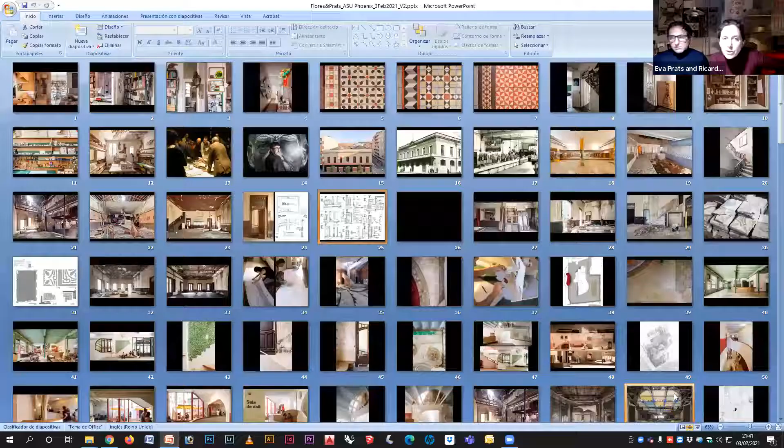We are based in Barcelona, and we occupy an old apartment house from the 19th century. We've been occupying its rooms for some years, so there's an accumulation of projects and models and drawings and presents from friends, even things no one in the family wants, like this mirror. We have it in our studio all around us. It's a place that has somehow organized our office with the rooms and spaces it has. We have set this order.

The main space with the most dimension is the corridor. This corridor is 30 meters long, I don't know in feet, maybe 90 feet. It takes like 15 seconds or more to go from one side to the other, and sometimes when it helps to think, because you walk this for a quarter of a minute, you find yourself on the other end and think, where did I come from? But maybe it's been useful to keep thinking.

The whole apartment has these beautiful tiles, and they change in every room. It's a very nice sequence when you move through the corridor and find these tiles, each with its own edges, and some of them move and make noises, so we know which ones not to step on. All the different colors and decorations on each one is something we really appreciate.

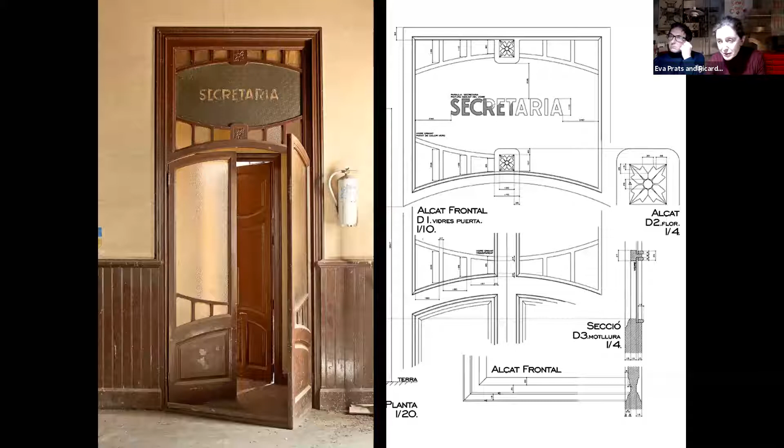We know this is somehow common material in Barcelona, and sometimes builders don't appreciate it and throw it away. So we drew it carefully, and things had to be taken out very carefully without breaking anything. I have a video that shows a little bit of the story of this, what happened with these doors and how many we found. Let me show it to you now - let's see if it works.

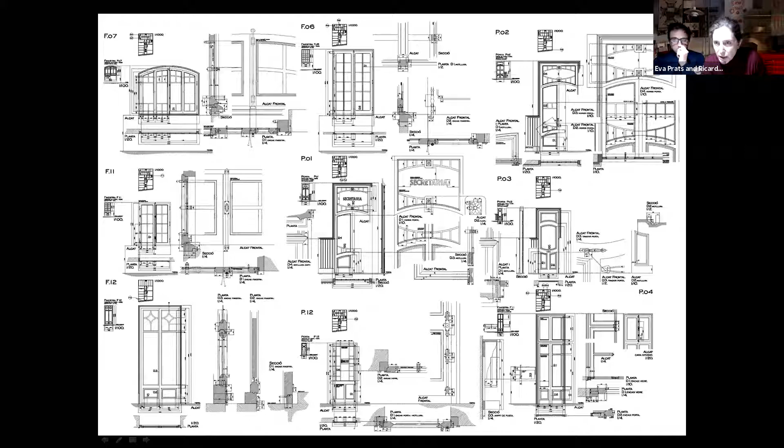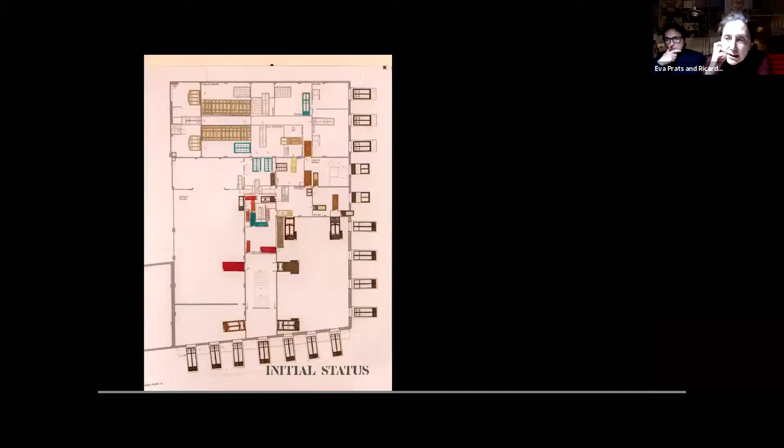We made it in our studio: 44 doors and 35 windows for the new Sala Beckett. This is the initial status on the first floor, where we found all these treasures. And you can see the project as we drew it - some of the windows and doors remain in the same place, but they change colors at the end of the works.

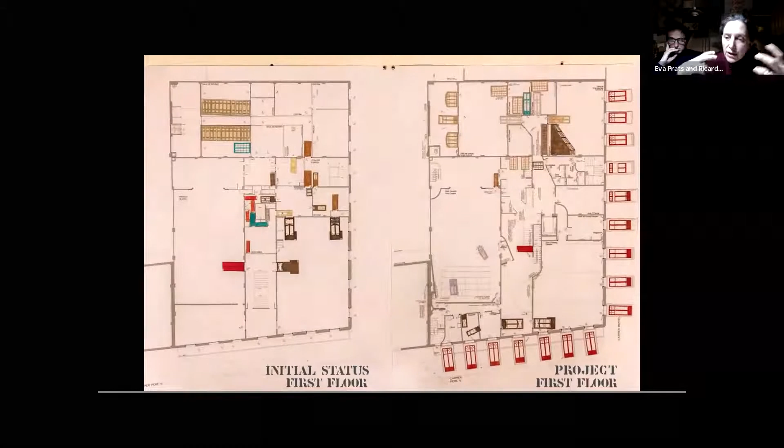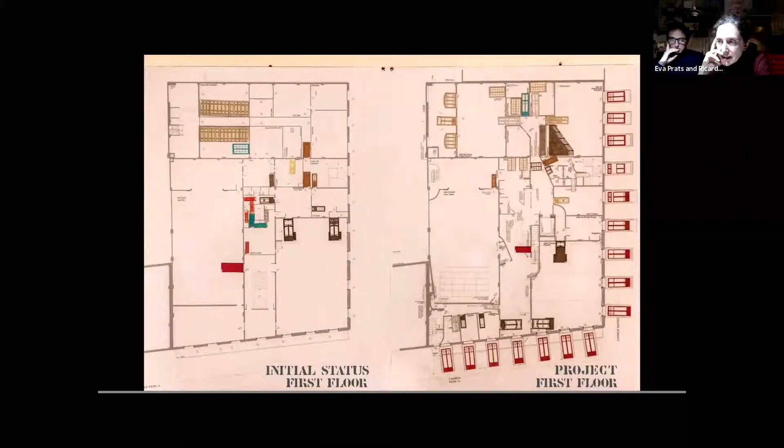Some of them were like flying in our minds because we knew that we wanted everything to be kept, but we didn't know where they would be placed because we still had to draw everything, and draw the new circulation.

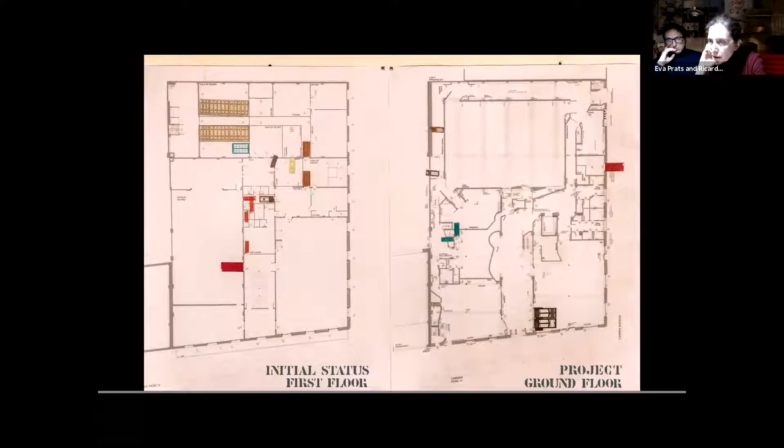So the first floor is completed and we go to the ground floor, and we still have a few elements remaining on the first floor, like these two big doors that travel together to the wall that relates the bar and the vestibule, because we wanted a very strong communication between these two. Very small ones go to the toilets, another little one to the kitchen, and this red one goes to the dressing room.

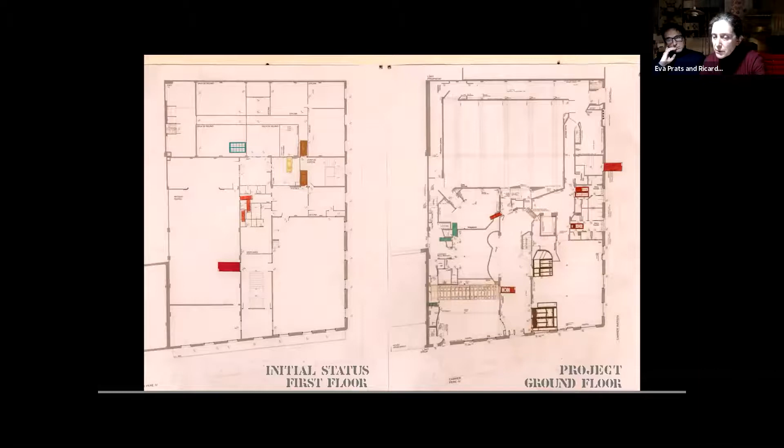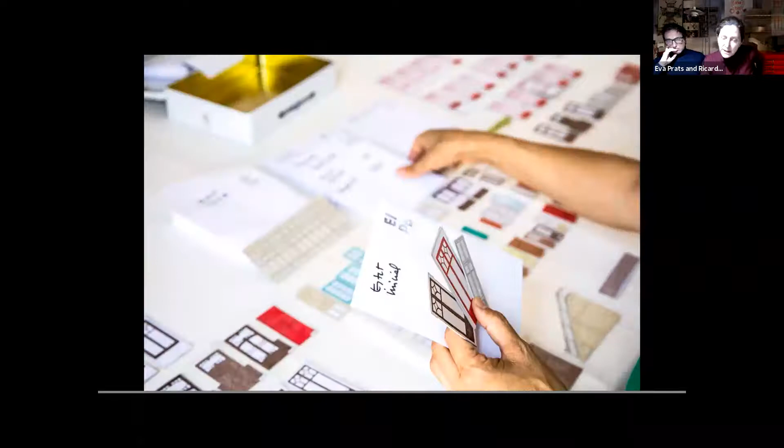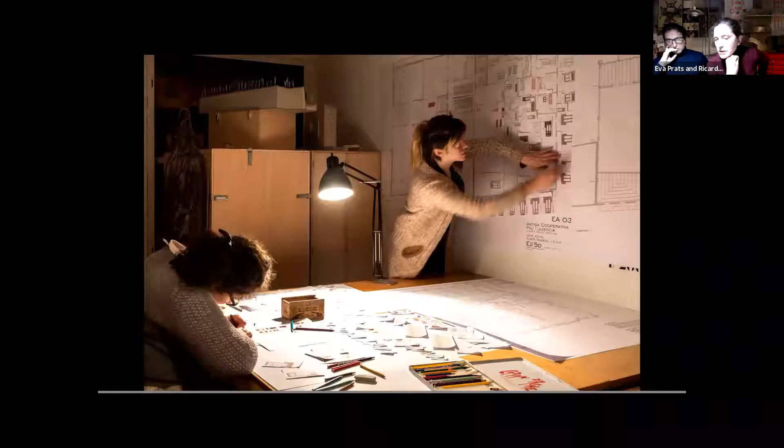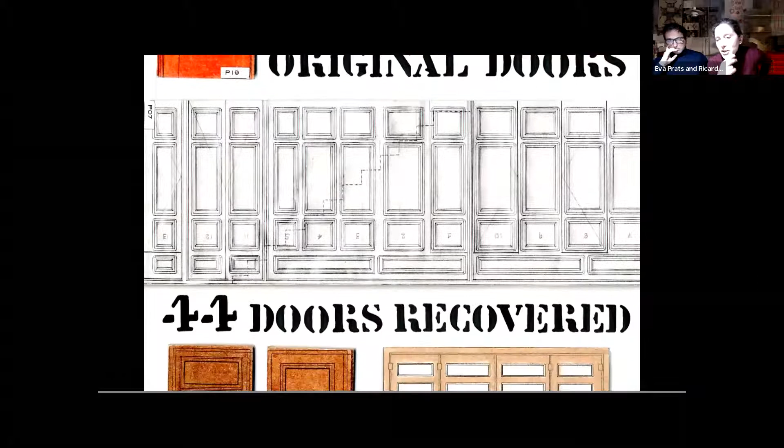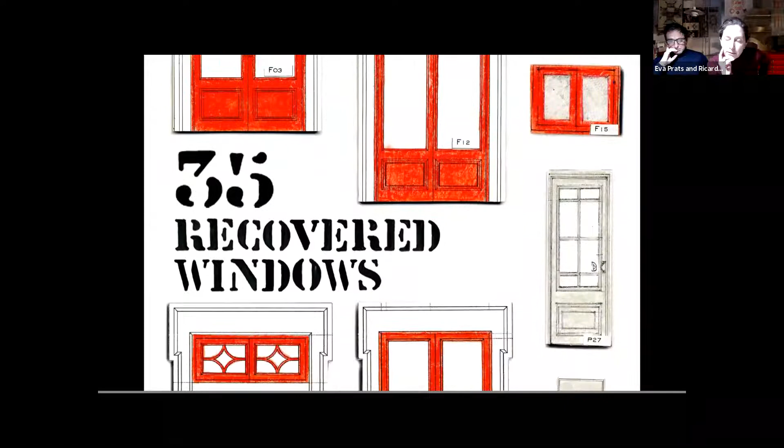So we made this video to explain what happened to all this amount of things that we really reuse. It was interesting for us when they came back to the site, because they had to be outside for a while in storage, and they came back with all this memory and richness, because each door, even similar sizes, had different partitions. So nothing was done in a systematic way. It was done during the holidays, every Sunday they would meet and build the building by themselves, the workers. So also the carpenter made a different door or window every Sunday.

So these are the characters of the film, passing and passing, a lot of them. It was very good to have the inventory, because as you can see, there were a lot, and for a while some of them stayed on site. Some others went to another stockage and warehouse and storage and came back later.

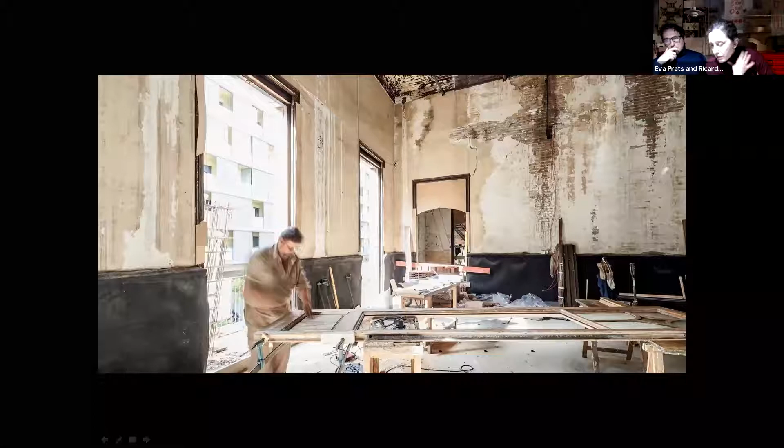So when there was a moment for the windows and doors to come back to the site, there were a couple of very good carpenters, and with them we were discussing how we could cut this window that had to be a little bit shorter. They were moving around the building every time, having the workshop in a different room. This was very nice.

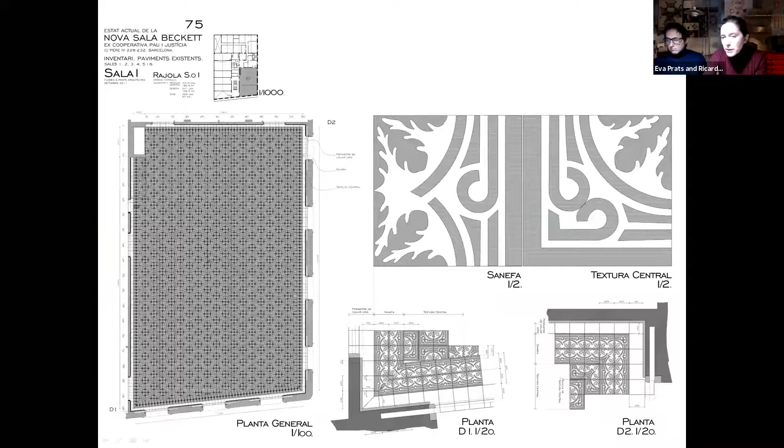We made the same exercise with the tiles, so we took them away and stored them for a few months. We have the inventory, so we know how many we have of each piece, how many of the edges. We also knew they were going to be placed on another side, because the old bar was full of these beautiful tiles, but it became a rehearsal room. And it's better to have a wooden floor for them, so they can nail some scenography on top of it, and it's also more comfortable for them.

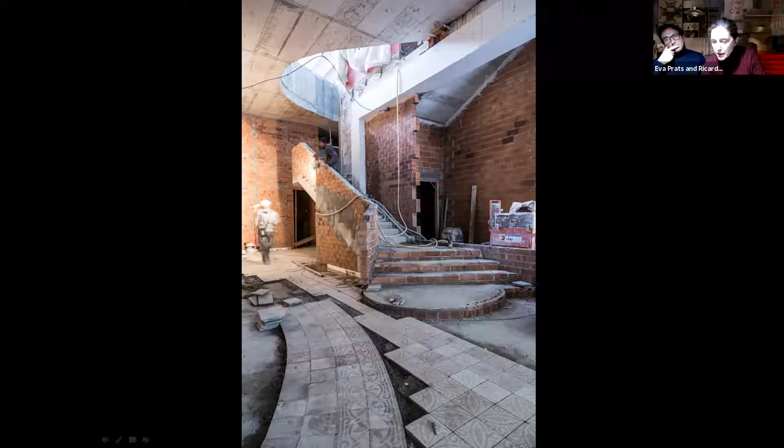So all the tiles we got from here could be used in another place, and we thought about also making the edges of these tiles move around. We tested this in our studio in the corridor with paper, to see what happens with the edges, because we wanted to make a circular shape in an area where there is a red sofa. We tested in the studio first, one by one, so that the drawing of these leaves, this kind of oak leaf, stays continuous - you don't lose it even if you cut the tile into a trapezoid.

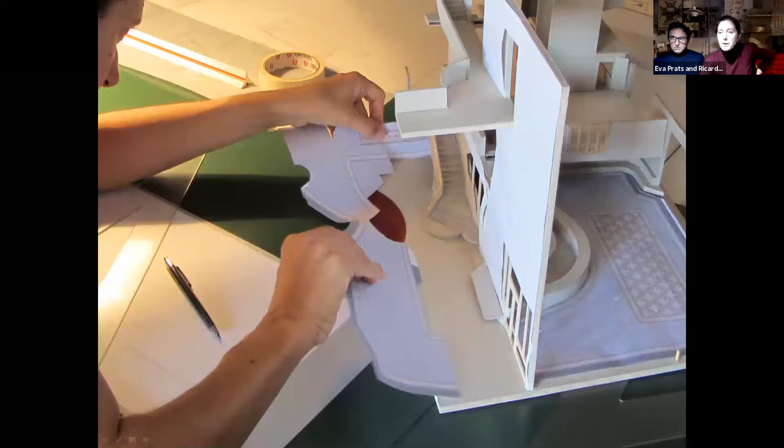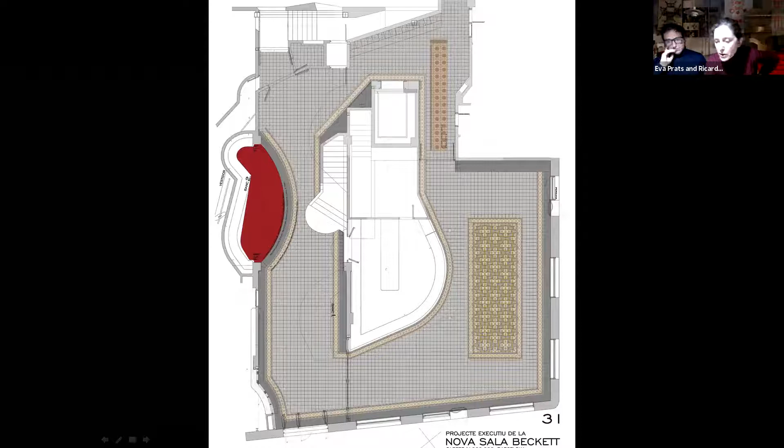Okay, all these kinds of tests, but manipulating - we really wanted the building to work with this material that we found there, but placed with a new use, like second-hand clothes that really fit you properly. So we wanted all the tiles taken from the first floor and moved to the ground floor to draw out the relationship between the bar and the vestibule, and these edges will show that it works as one - they are very linked together. So we are in the bar now, and this is the picture.

This is basically the picture of the old gymnasium. Under the plaster, we discovered the old pillars were still there, so we show them, and the tiles from the first floor go down. With the tiles we found on the walls that are kind of greenish, we painted some pieces green, and painted green the two big doors and the window that will relate this bar with the vestibule.

All the lattice of these windows and doors were very useful for us to make this communication. When the light is on, we see the administration and the red wall with a red sofa that's there. On the other side of these doors and windows it's brown, the brown they used to have. There were also traces of some staircases to mezzanine levels, which we removed because we wanted to recuperate the very generous space of the original cooperative.

There were also traces of another staircase here, and a door that doesn't open now. The door that used to go to the theater now goes to the director's room, with a new bench where someone waits to be attended. These old decorations were in the theater, but the ceiling was falling down, so we couldn't recuperate the whole ceiling - we kept some of the decoration and applied it again.

So everything had the same use that it used to have in the previous drawing. It was very pragmatic, no interpretation - things are what they used to be.

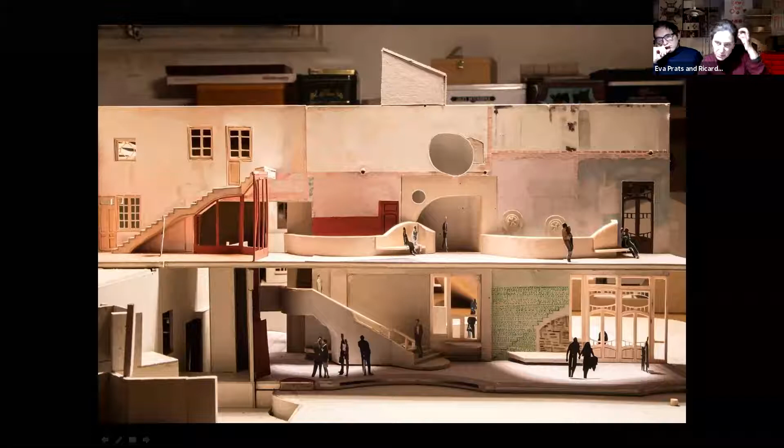This is the model where we start applying colors, because we thought this project probably had to do a lot with colors - usually they are more monochrome, but in this case we started putting them in. Here is the floor slab in the center, a new floor slab with two big holes that allow light to go down into the vestibule.

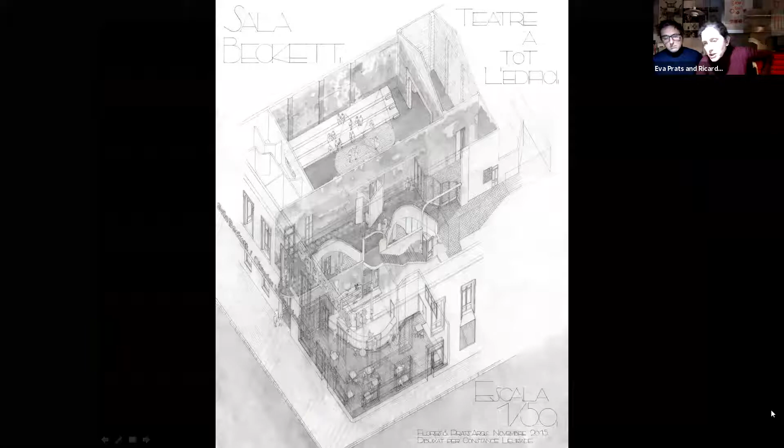This drawing we made after finishing all the construction documents - we call it 'Theater All Over the Building.' It's because the theater goes out into the vestibule, into the bar, from the bar to the street. We were thinking the whole building would be kind of theatrical, and they've been using it to make theater a little bit in the vestibule, in different rooms, and also in the way people move around this very thin wall that you can see here.

It's just 15 centimeters, very, very thin. You cross it and appear very quickly, and casual encounters were very important here - when you meet a teacher you've had in class, you meet him in the corridor and ask something, or you meet with friends.

So it's this community of the theater that has occupied this building and found its place, moving through it very easily. At the end of this corridor are the classes, which are the more private part of the program of this building, but it's very connected, very intuitive and direct to the street, the most public part.

So it's not only a theater - things are happening all over the day. They open at 10, and by the end of the day there are theater exhibits happening. But during the day, a whole lot of things are happening.

In the central part of this first floor is this skylight that we opened, cutting the floor slab and making this quarter of a vault, getting light from the other side of this wall. So it's different - we don't see the window, but it's on the other side of the wall.

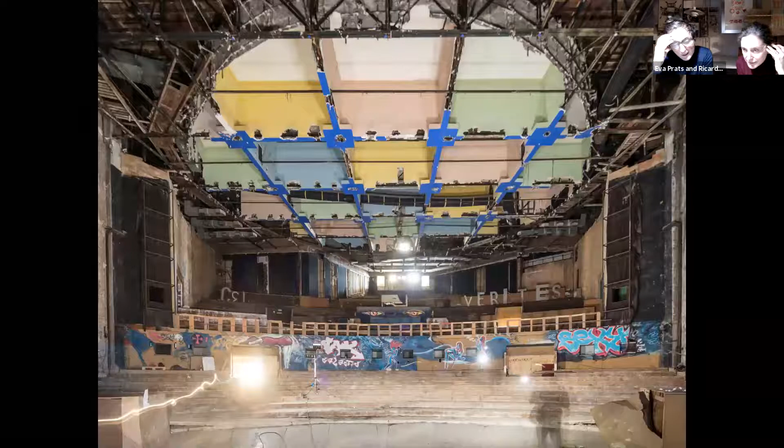The building was in a state of ruin as well, because it was abandoned, but it was also occupied at different times. The last occupation had ended with a fire, so the structure is not in a very good state. But still, the building is very impressive.

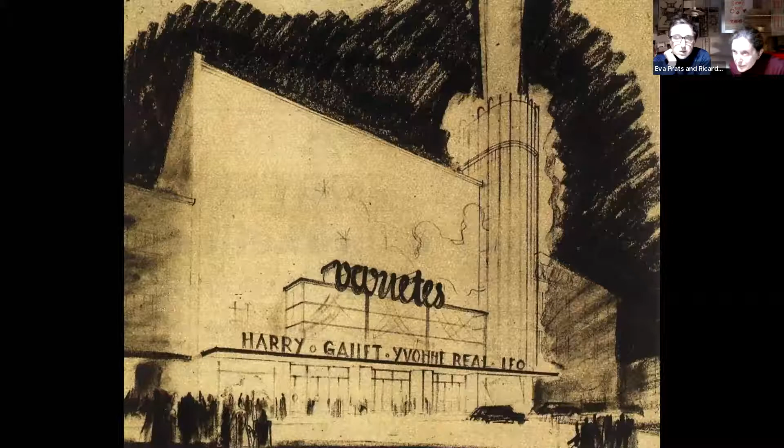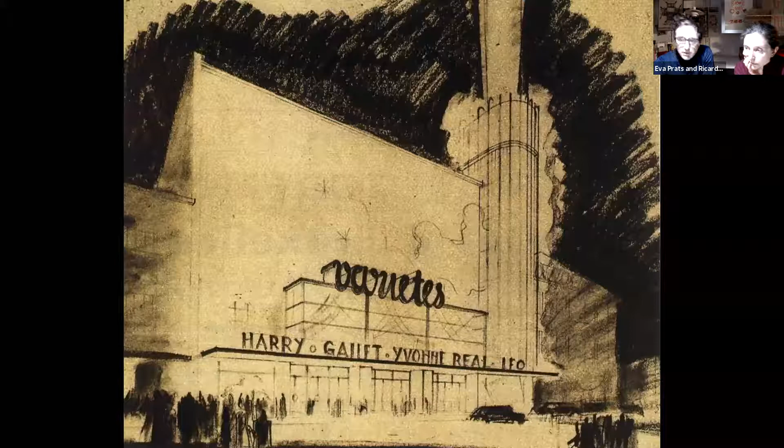It was designed by Victor Bourgeois, an architect from CIAM, the modern movement. It was very elegant, white, with galleries and very fine windows and doors, and this very tall lamp announcing its presence from far away in this old town.

The area is still the same, and the building is still there, as you can see from the facade. The only thing is that the area today is in a very decadent condition, full of drugs and prostitution, and the building itself is blocked because it has been occupied, as I said already.

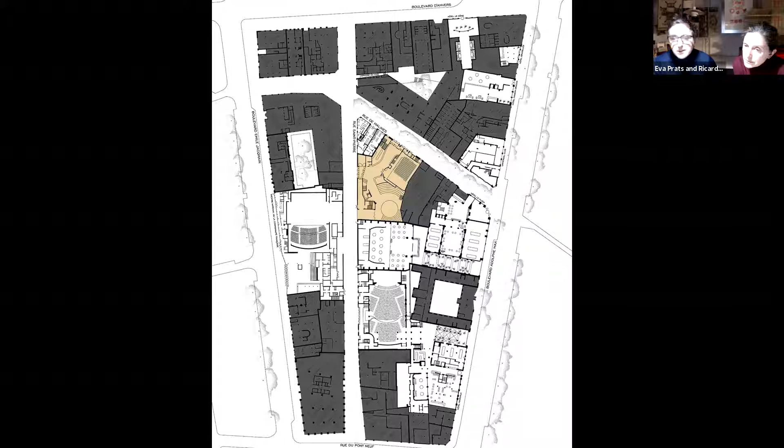So we are surrounded by this empty condition of the interiors, and the Variétés itself impressed us, because in the program of the competition they were asking for two performing spaces for music: one very big for 1,000 people, the other smaller for 400 standing or 200 seated. Besides that, they were asking for an open space, what they call a forum, a place where everyone could come in, move around, and see around, even sometimes used for a debate, a kind of open street condition, if you want.

When we entered and saw this space already empty, with this volume of air, we thought that the condition they were asking for in the competition was already there. We thought if we could save, or keep, this empty space with the Cage de Scène, which is the fly tower in front of the stage, and all this volume of air inside, which is very surprising and unique, that was already the public condition they were asking for.

So we organized the whole competition around trying to locate these two performing rooms without touching or losing the scale of this empty space we found, in order to have the street condition we were asking for already there. The only thing this space lacked was natural light, for us to have this condition of a street, of a public space.

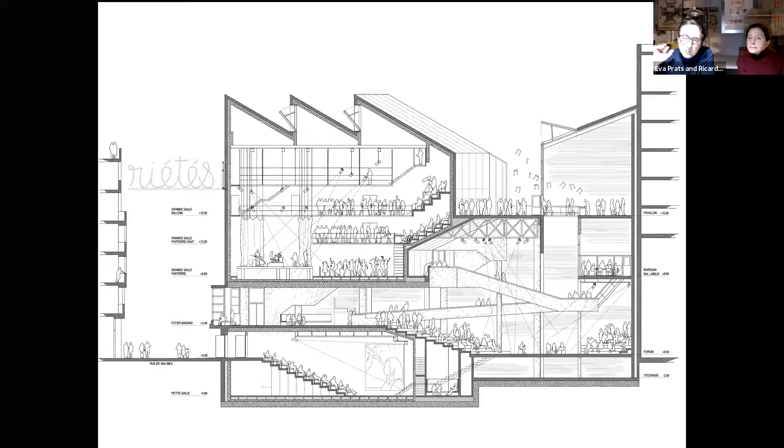So all these grades you see in the section facing the forum are above the Petite Salle, and you are in these common spaces, under the big salle, which is above you. In a way, one is the floor, the other is the sky, and you pass there without realizing you're passing in between these two spaces, but you're attracted by the natural light of the Cage de Scène.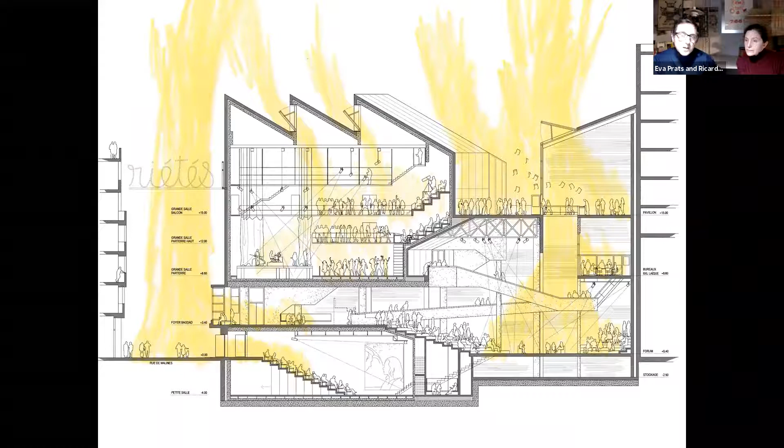You get in, you see something, you hear someone playing a guitar, or a debate, or a conference, a lecture, something that's free. You don't pay in these spaces, and then you can decide to go to the spectacles in the two big salles. So these are drawings from the competition.

The big effort for us was how to save this kind of void we found, which is very unique in this whole part of the city, because it's a very packed and dense part of town. In the plan, you can see these drawings were trying to connect the big salle with the forum all the time.

So when you go up, you see in the section, you enter, and then you enter into the forum, and then you climb up the grades, and there you can see the street, and there will be a bar there, called Foyer Bagdad. Then you take the long ramp into the fly tower, and move up to the big salle. And when you're in the big salle, you can still climb the grades and arrive at the terrace, which will be open air. So in a way, you are climbing all the time.

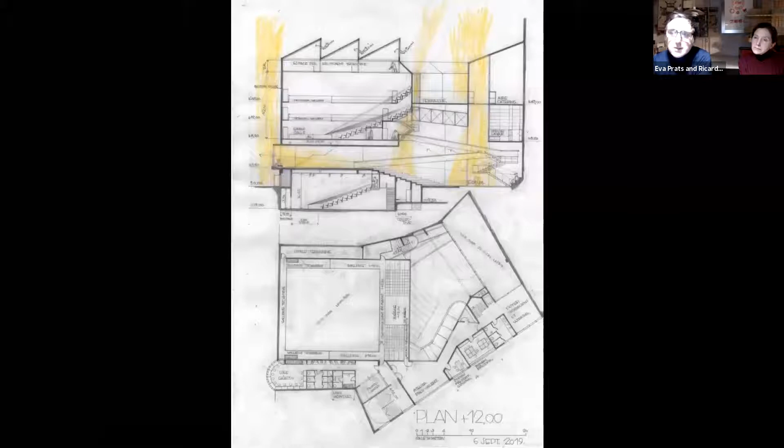The section shows this kind of vertical condition of the building, which was very important for us, because it's very dense, as I said, so it's important to go up into the light.

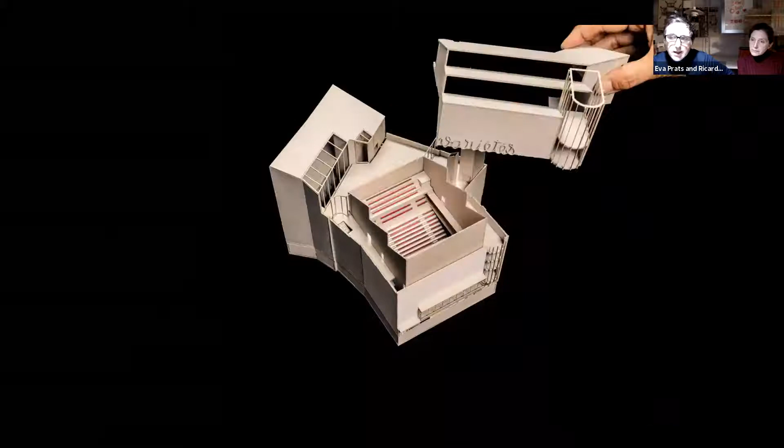So the big salle is here under this shed-form roof. These sheds give light, they can bring light into the interior of the salle, as you can see here in the section. So if you take this roof away, you have the big salle.

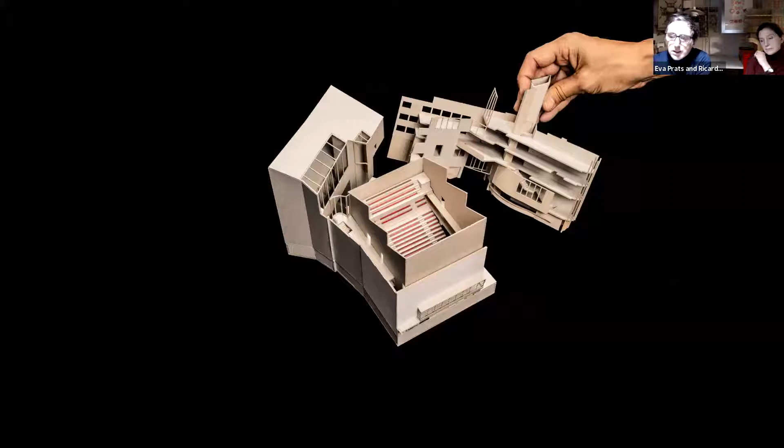Then you have this lateral building. This building allows everything else to work. There will be dressing rooms there, technician rooms, meeting spaces for the client, and all the working spaces are in this kind of building inside a building.

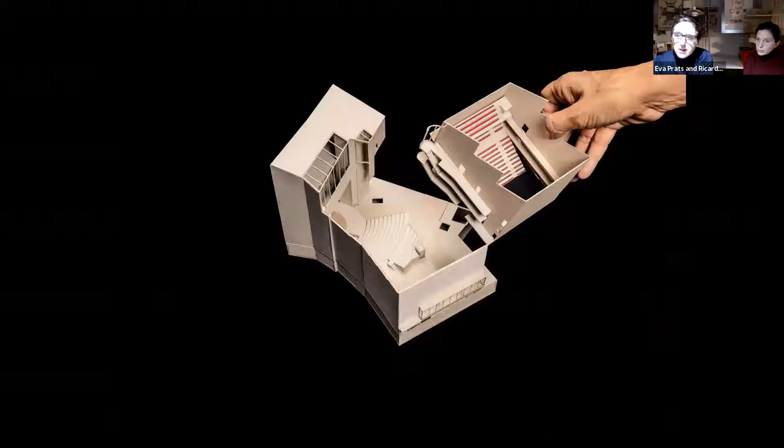And then if we take the big salle away, we see the grades, a fragment of the existing ones that will remain there as a ruin, in a way. And then you can climb up into the bar, or sit there to listen to someone talking, or whatever. So the Cage de Scène becomes a skylight that brings light down to the former stage.

And so if we take these grades away, we discover the Petite Salle. All of this is connected with this.

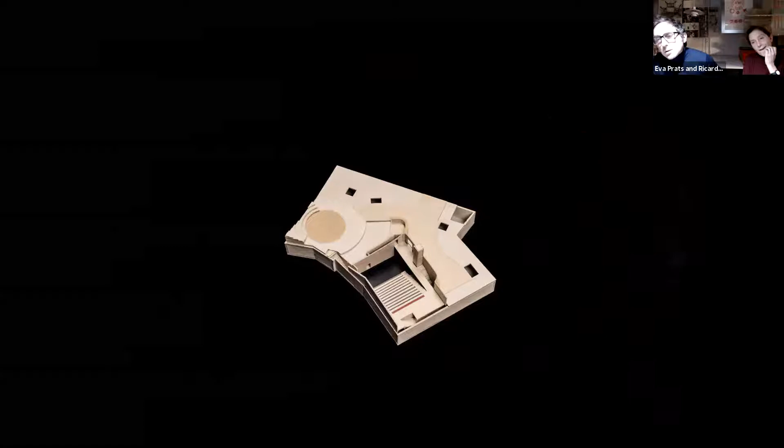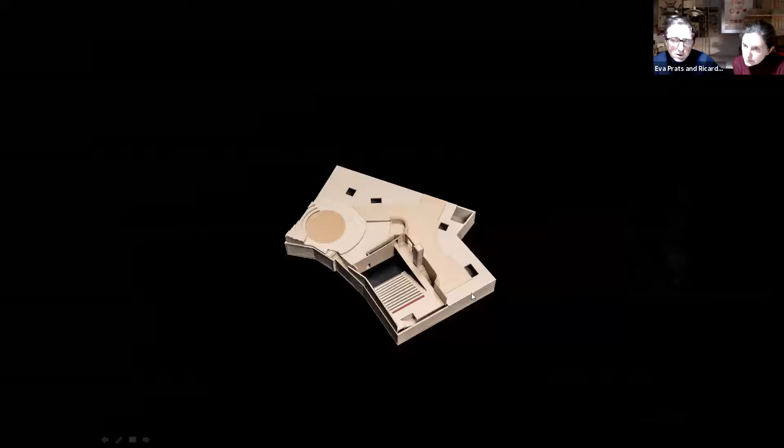You see here what we call the rue intérieure, the interior street, a shortcut between the two streets. This connects Rue Malines with Rue Saint-Pierre. The Petite Salle is also connected very much to Rue Malines, so this room can be activated only from the street if you want, but you can come in, cross, and see a bit what's going on in the forum, in the Cage de Scène, and leave without necessarily going to any of the spectacles playing in the two salles.

So here you can see the rue intérieure. This is very important for us because from one street you can see the other, you see light and you can cross. While you cross, you can pass near a bar, or see the theater, the Petite Salle, what's going on there, or ask for information at the information point, or have a coffee and listen to someone, rest for a while, and then leave. So it's a street condition.

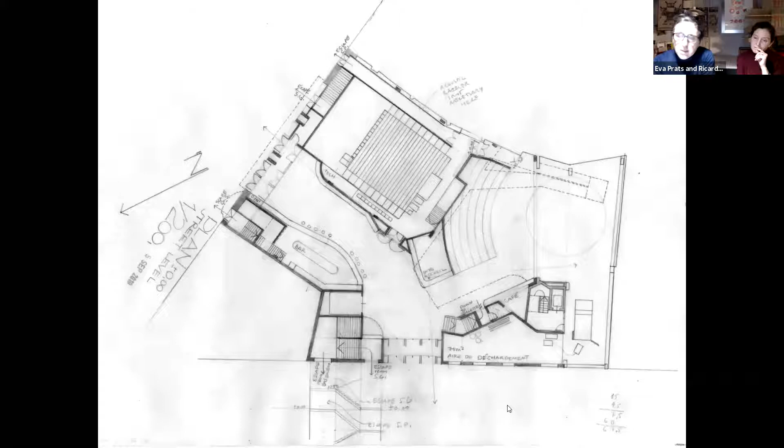It's a public space with a topography. You climb up, and then you are always attracted by natural light from the former Cage de Scène. Here you can see all this public space.

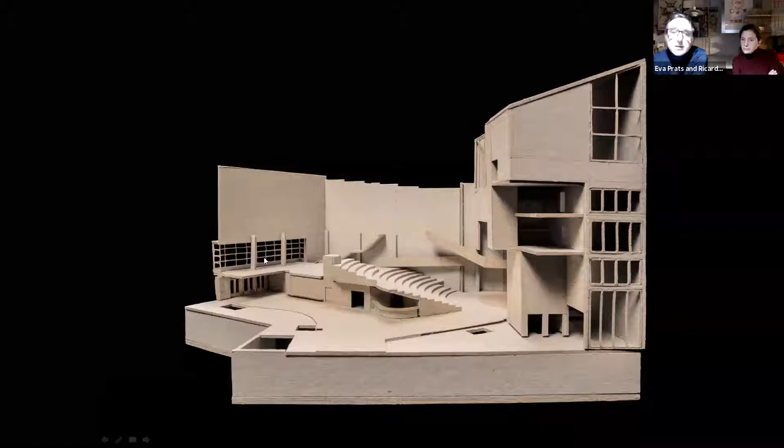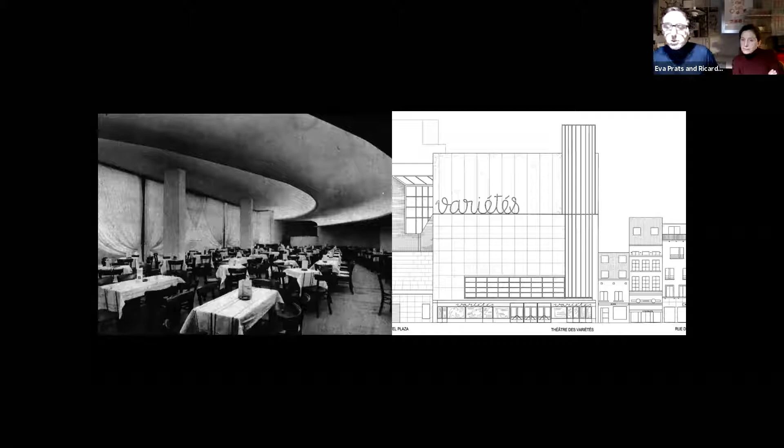Up there in this space near the street, you find the former Café Bagdad, which is on the left. You see an image from the moment when it was very active in the city. So we call it again Café Baghdad. It was much more informal, without so many tables, but it will be a bar as well for waiting for performances or taking some drinks and going away.

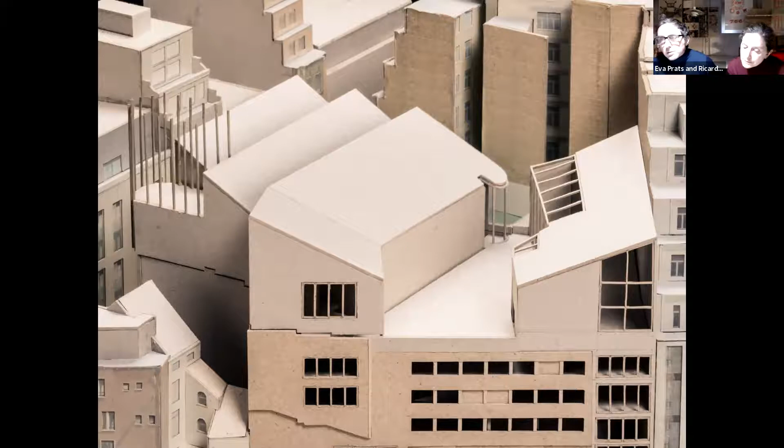It's a surrounding that has been growing with these hotels and offices around us. So the building also grows to be near the neighbors, but at the same time, with the terrace and fragments of roofs, it's trying to get to the scale of what we have around.

This is the actual condition. See here the Cage de Scène. All this wall and roof will have a big window now, bringing light in, because before, as a flight tower, of course it was opaque.

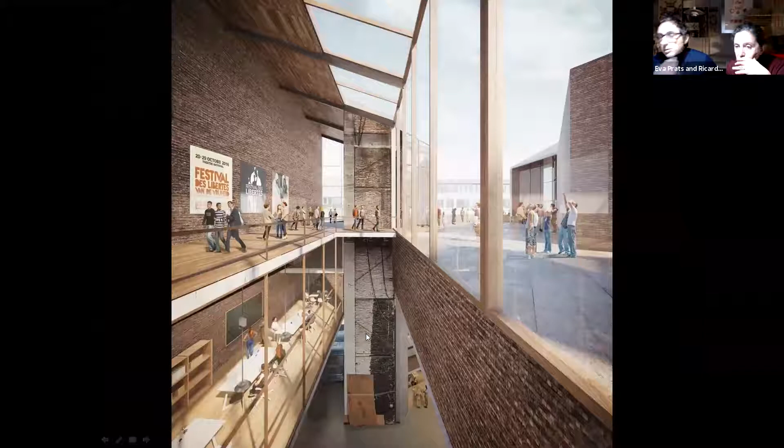Fragments of this terrace will become the terrace of the new Variétés, and the big salle will be somehow here. So when these windows are there, the Cage de Scène will become a place that brings light down, but also connects with the terrace. It could host performances, or a presentation of a disc, or a book launch, or whatever—it could be part of the festivals.

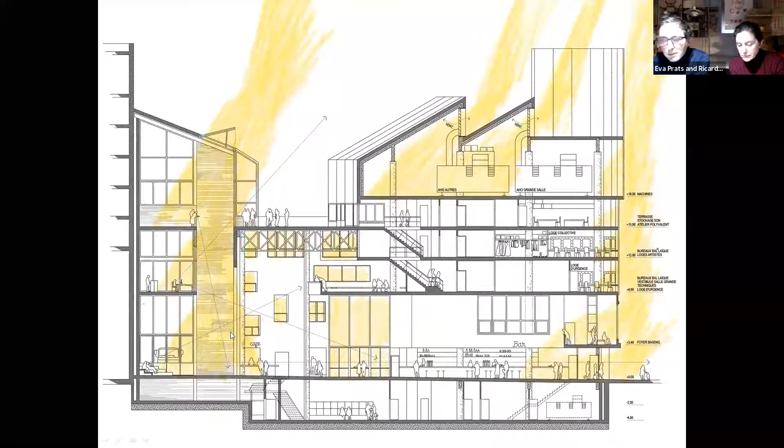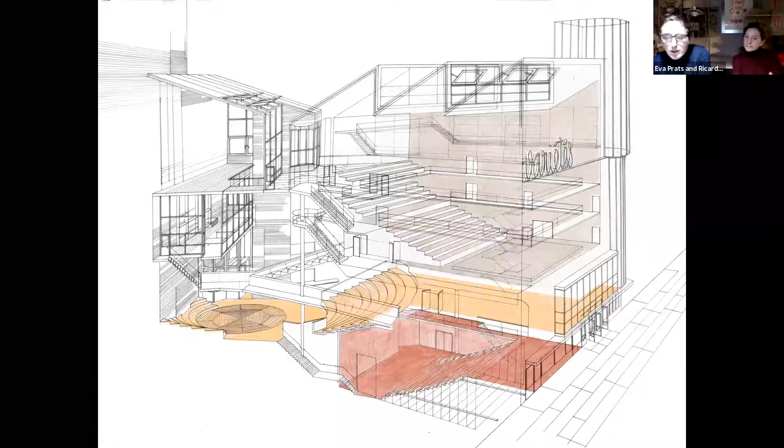That's something the project offers, a place that can also be occupied, rented, or used simultaneously with the activities, so that the four places could be activated simultaneously. You can have shows everywhere at the same moment.

So this is the facade, the former one extended with a new one, which we need now much higher, and the letters there. In this case, the facade is listed because this building is from the CIAM and by Victor Bourgeois, an architect whose architecture is valued and listed. So we have to continue, but keep this facade and renovate it in a good state.

The case of Sala Beckett was not the same. As Eva was saying, the building was not listed. So in this case, all the remains of the abandonment of the building, we also wanted to leave it.

We didn't want to restore the building to a former state. We thought that the abandonment and the years of decadence of the building was also part of its life, not just the cooperative. So all this moment in between was important, and the new Sala Beckett brought it all together in one.

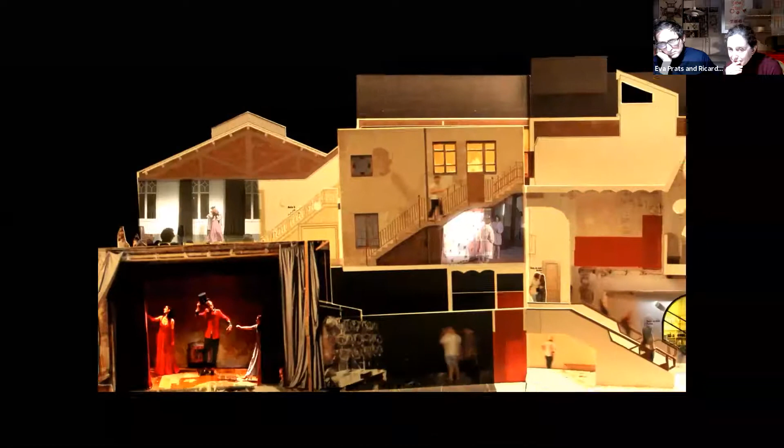Thank you. Thank you.

Thank you very much for this wonderful talk. Two great projects. I was impressed by and interested in the idea of these two adaptive reuse projects being linked to theater spaces, and the similarities between scenography and the kind of work you do around adaptive reuse and playing with the materials of the space. So thank you very much for that.